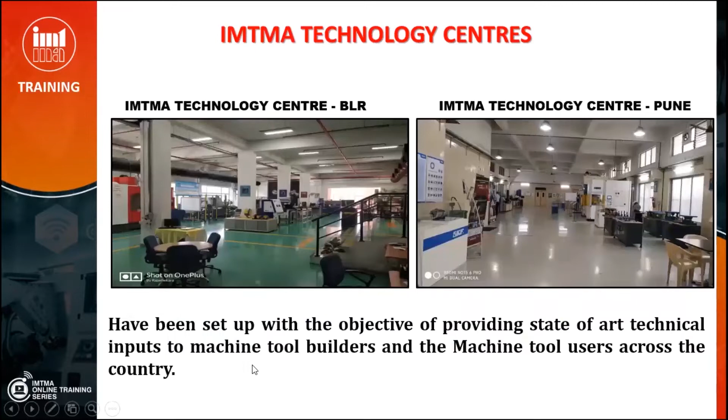Our technology center in Bangalore and the technology center in Pune, and each of these facilities are fully equipped with all the requisite machinery, metrology equipment, accessories, automation lab with robot, and is completely industry 4.0 ready.

We deliver our training programs in 4 different ways: short-term programs, in-house programs, e-learning, and long-term courses meant for young graduate engineers. Our classroom training programs are delivered by experts who have experience in excess of 30 years, with a blend of theory and hands-on training wherever possible.

We supplement the programs with demonstration of live machinery or industry visits wherever possible, and we encourage a healthy interaction between the participants and the faculty through the program.

Our e-learning initiative is delivered through an exclusive e-learning portal, and the current portfolio is about 10 programs which can be accessed by the participants at their own flexibility during the license period. The entire program can be taken at their own convenience and flexibility, with assessment, evaluation, and certification being provided through the e-learning platform itself.

Ever since April 2020, we have come up with the online training initiative, and till date, we have completed over 300 programs, addressed over 15,000 participants, and we have made these programs easily accessible to various types of participants, which can be taken up at a minimum training budget.

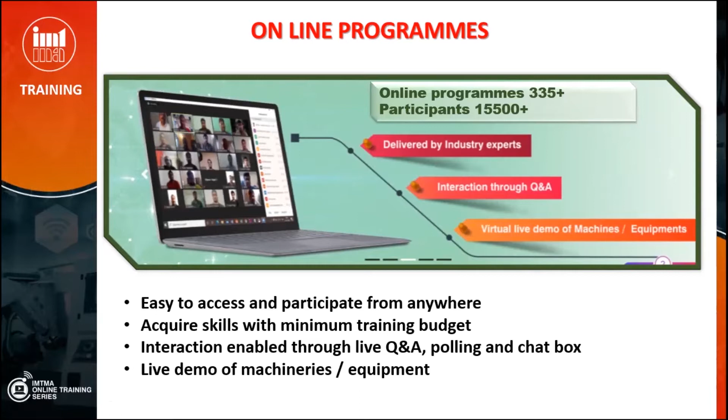And we enable live instructor-led programs with interactive question and answer sessions, polling, chat box, and we also provide live demos wherever possible during these training programs. Long-term programs are primarily meant for young graduates who wish to improve their employability prospects by taking up a few programs on design, production, automation, FEA, and these programs are available in long-term mode for young engineers.

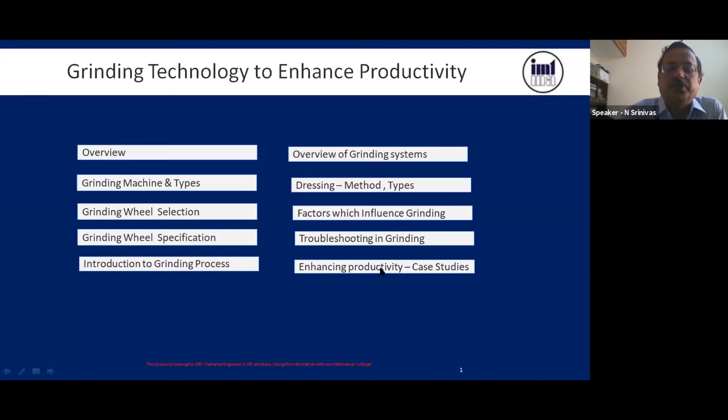Now let us start with grinding. In any manufacturing setup, grinding is a finishing process which involves multiple parameters like work material with correct heat treatment, process parameters, and selection of the right grinding wheel and machine.

This grinding is a finishing operation that comes at the end. Initially raw material comes, then soft edge operations like turning and milling happen, then it goes for heat treatment, and then it comes for grinding.

Grinding is the most critical operation in the entire process chain. The grinding wheel plays a major role, machine requirements are very stringent, and the skill of the operator also matters. Since it's a final and critical operation, any rejection at this stage involves high cost and affects the productivity of the company.

The grinding technology program is designed with the intention to impart a practical approach for grinding with appropriate industrial case studies, so that participants will understand the practical aspects of grinding. That is the main intention.

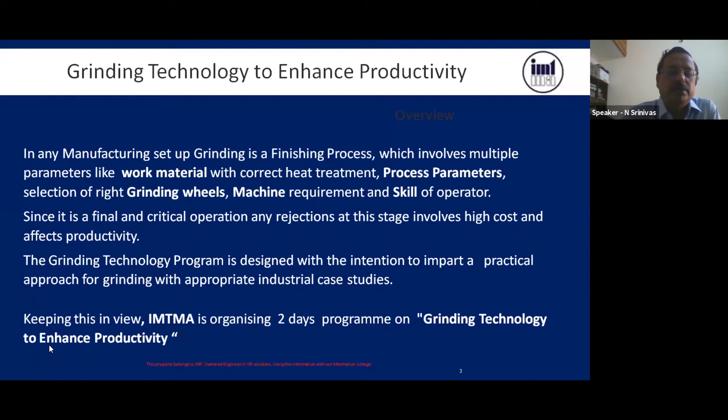As I told you, this IMTMA program is conducted for 2 days. Here I am giving some bird's eye view of it, starting with the system approach for the grinding process.

What are all the system inputs? One is, as I told, the machine tool - that is structural compliance, kinematics of the machine, and what type of bearings and spindles are used.

This is very, very critical in grinding. For example, if you are doing rough grinding, the types of bearings and spindles used are different. If it is fine grinding, it will be different. So depending upon the application, the machine is designed.

Similarly, operational factors like grinding cycle, speed, feed, and depth of cut will come. This basically comes in the program.

And work material - what type of configuration the component has. If there is some intermittent cut, you may use different types of feeds and speeds. If it is a continuous round and profile, it is a different one. So depending on the geometry of the material, you may have to alter the grinding parameters.

And surface properties - if it is a very hard surface, or if more stock is there, you will have different parameters. When it is fine grinding, it's less stock. So depending upon the work material, you may have to change the parameters.

Material properties mean hardness and toughness of the material. And tooling and supplies like abrasive - what type of abrasive you are using, coolant, and work holding. Work holding - you may be holding between centers, or you may be holding with the chuck. So these things will come with respect to process.

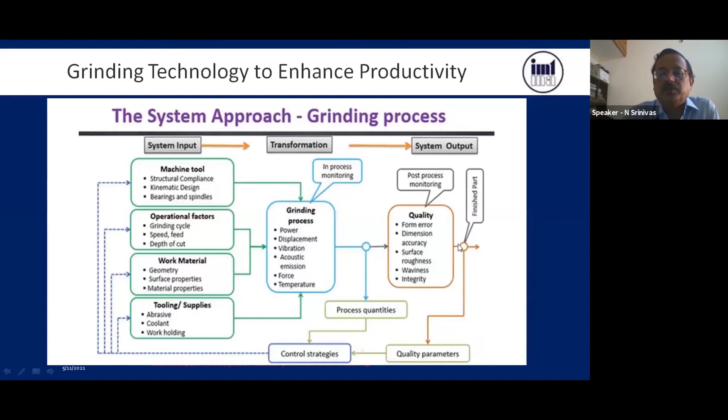Now we'll come to what is grinding. Grinding is the most common of abrasive machining. In case of milling, what happens? The cutting tool actually cuts the material, whereas in case of grinding, these abrasives - called grit - will remove the material.

It is a material cutting process which engages an abrasive tool whose cutting elements are grains of material known as grit. Actually, these grits are embedded in a bonding material, which I will come to in detail about the grinding wheel.

Along the periphery, there will be a number of these grits. So when the wheel is rotating and the work is rotating, it will come in contact with a number of grits so that it will remove the material.

The grits are characterized by sharp cutting points and high hot hardness, chemical stability, and wear resistance. Grits are held together by a suitable bonding material, which gives shape to the abrasive tool.

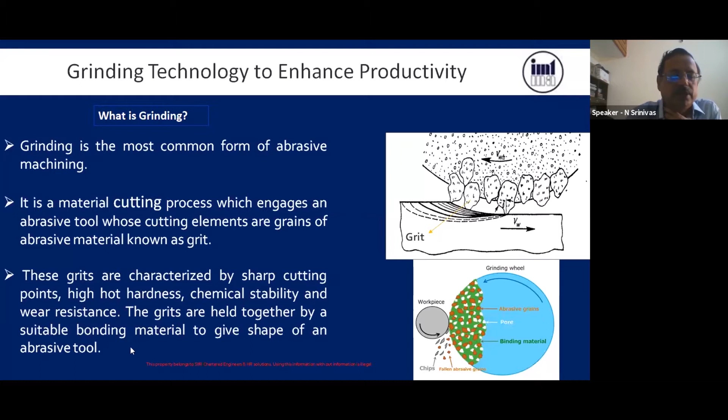So this is the grinding wheel. Now we'll come to how actually the interaction takes place.

Whenever this grinding wheel rotates and crosses the component, grinding takes place in three phases. One is cutting, where the material removal process removes the material, then plowing - where subsequent grains cause displacement - and finally sliding happens. In these three stages, the finishing of the component is achieved in grinding.

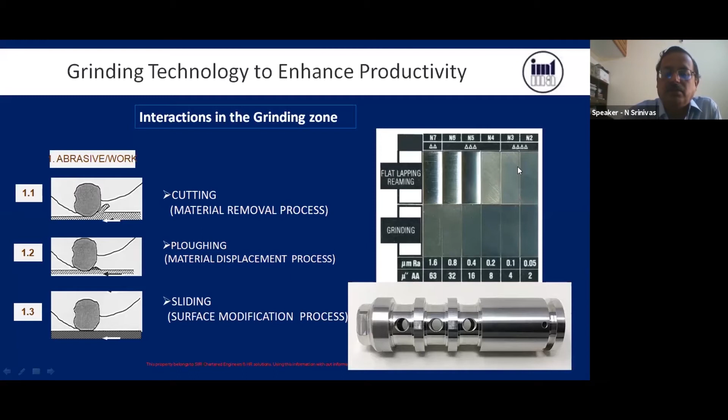When we talk about 1 micron, for example in turning we can achieve about 6 to 8 microns, and in milling, vertical and horizontal, about 10 microns accuracy. Whereas in grinding, we talk about less than 5 microns, and less than 1 micron in super finishing. So this is the accuracy that we are expecting.

What is 1 micron here? Micron can be visualized like this: if you take the diameter of human hair, it is about 70 microns. If you vertically slit that into 70 parts, that is 1 micron. The naked eye visual threshold is about 40 microns, so you can visually see only things of 40 microns or larger.

Our human white blood cell is about 25 microns, red blood cell is about 8 microns, and bacteria is around 2 microns. So this is the accuracy we are talking about in grinding. It is a precision process.

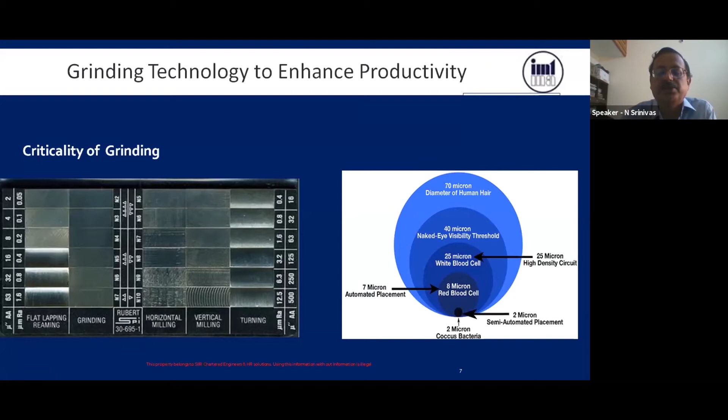What do we aim for in grinding? One is surface finish, and second is form characteristics like straightness, roundness, and cylindricity. That is what we expect in grinding. It is a finishing process, so most of the time we aim for stringent tolerances of form and surface finish.

Then why is grinding required? We understood what grinding is and why this grinding application, why grinding is required.

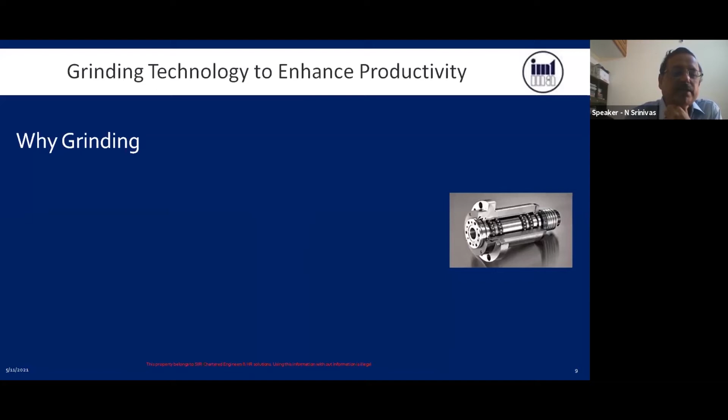Grinding is used for machining materials which are too hard for other manufacturing processes. Once after heat treatment, hardness will be in the order of about 50 to 60 HRC, which you cannot machine by turning or milling. So then you have to go for grinding. Machining of materials which are too hard for other manufacturing processes requires grinding.

Grinding is also used to finish mating parts with minimum friction. That is, whenever, for example, a shaft and journal come together as mating parts, both surfaces should be ground. Then only we will get the right fit and tolerance.

Wherever we want close dimensional accuracy, we have to go for grinding. And when we require a high degree of surface smoothness or surface finish, for example on certain faces and IDs, then we will go for grinding.

Grinding also achieves stringent form geometry like roundness, straightness, and cylindricity. When these are very critical, we can achieve them only in grinding, or in the next super finishing process like honing. For honing also, grinding should be a pre-process; we have to grind and then hone.

Grinding also provides finishing of parts with reliable size and form retention. We want consistent size requirement and also form retention. Form retention means if we achieve roundness and straightness, that retention should hold over a period when doing mass production. Then we use grinding.

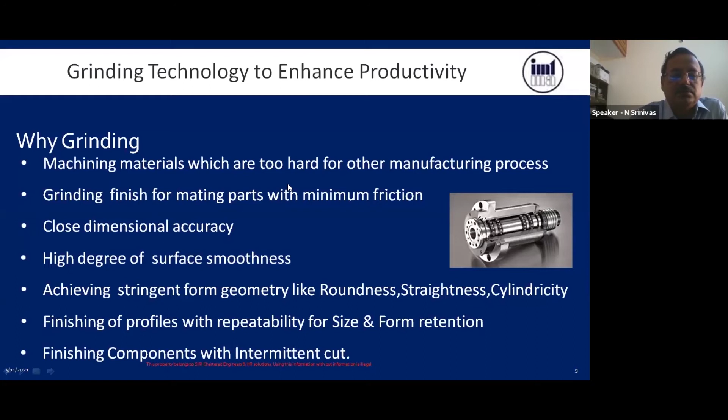So, links in the grinding process. One is material - what type of material we are grinding, whether it is hardened or soft, what is the hardness, and whether we are grinding diamond, aluminum, or steel. So the process depends upon what type of material we are grinding.

That is number one, and next is grinding fluid - what type of coolant we are using. For aluminum we use a different coolant, for steel we use a different one, and if you are grinding diamond, it will be different again. So grinding fluid is another link.

And the next link is the machine - what type of machine you are using. You cannot use the same machine for everything.

So in most of the machines, by manipulating our cutting parameters and certain tooling, we can use the same machine for different materials and different configurations of parts.

The next is grinding wheel, which I will explain in detail - what is its specification, that is also critical. Then comes clamping method, how you hold the component for different configurations. If the wall thickness is less, how you hold it, or if it is a rigid bar, how we hold it - there is a method of holding.

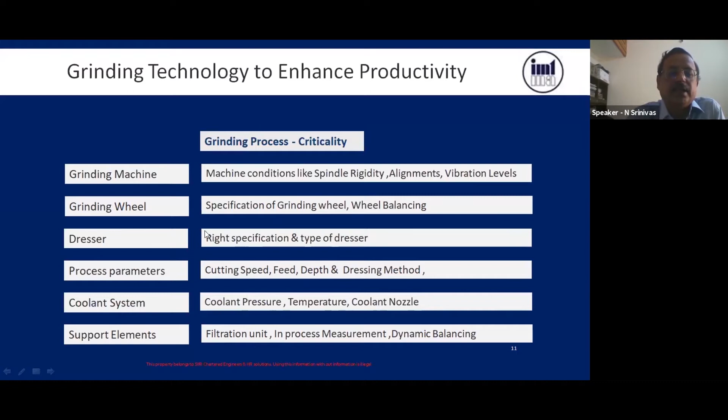As I explained, machine condition like spindle rigidity, alignment, vibrations, and grinding wheel specification are very, very critical, and wheel balancing is critical. When it comes to dresser, right specification and type of dresser matters. And process parameters - cutting speed, feed, depth, and dressing method. And coolant system - coolant pressure, temperature, coolant nozzle. And support elements like filtration unit, in-process gauging, and dynamic balancing. These are all the things which become critical for grinding. This is the link I have just elaborated here.

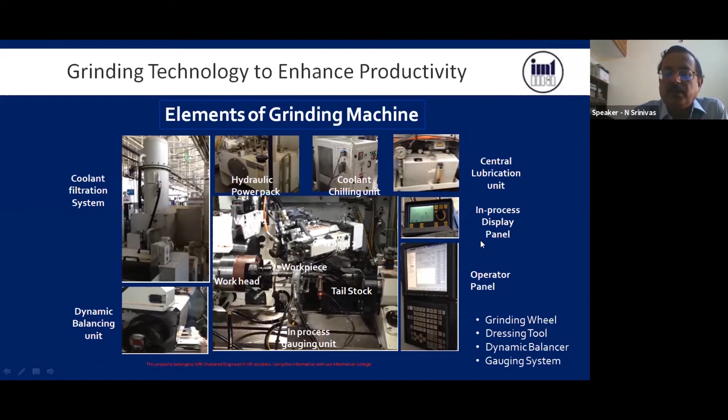Many times when you are grinding parts with accuracy less than 1 micron, the temperature of the coolant is very, very important. So cooling chilling unit and hydraulic power pack - this is basically for power, for clamping mechanism - and coolant filtration system, this is also very, very critical, and dynamic balancing unit. This is in-process gauge digital display, and this is my monitor. So this is the overview of our grinding machine.

Okay, now so far we understood what is grinding and why grinding, where we are with grinding. Now we'll see applications of grinding.

This grinding is very, very critical in auto ancillaries. Most auto components are ground, and it's used in steel industry, bearing industry, electronic components and devices, and aerospace. Aerospace has a lot of applications - turbine and medical industries.

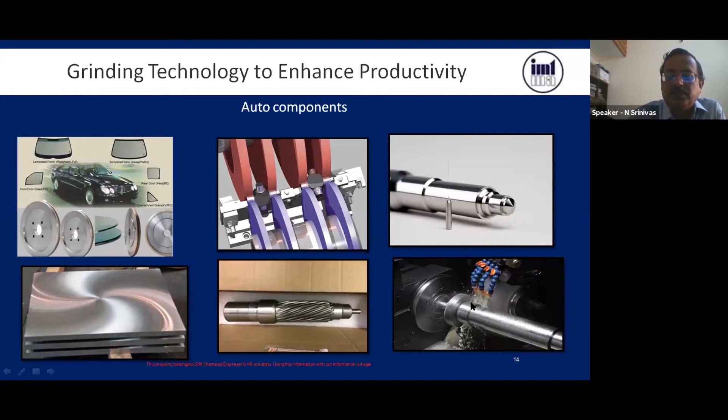So there are some examples of auto components like camshaft, surface finish grinding, cylindrical grinding. These are all the applications where we use drive shaft auto components.

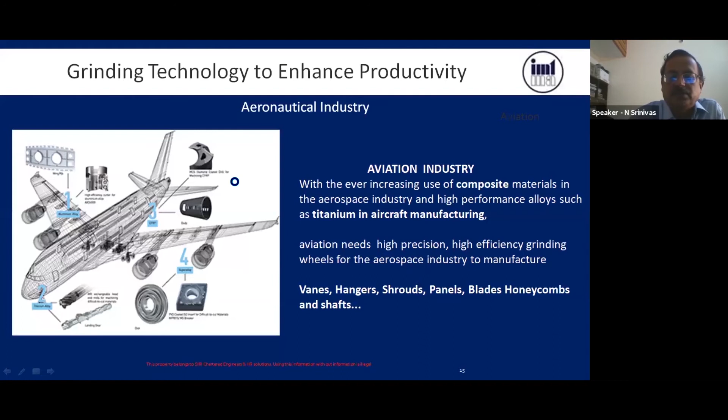Similarly, these aeronautical components need high precision, high efficiency grinding wheels. The aerospace industry is very, very critical, where we grind vanes, hangers, shrouds, panels, blades, honeycombs, shafts, etc. Such applications are there in the aeronautical industry.

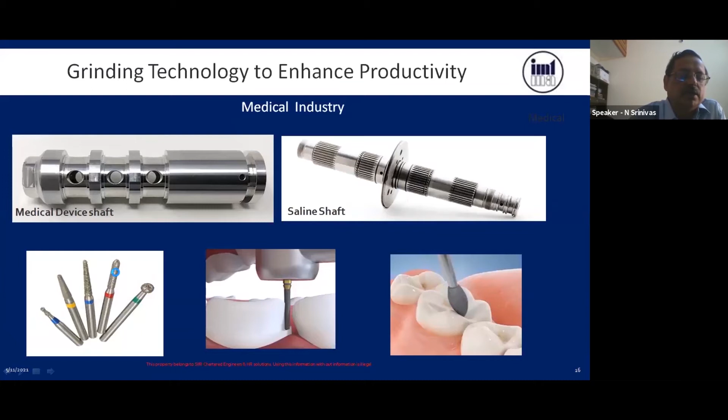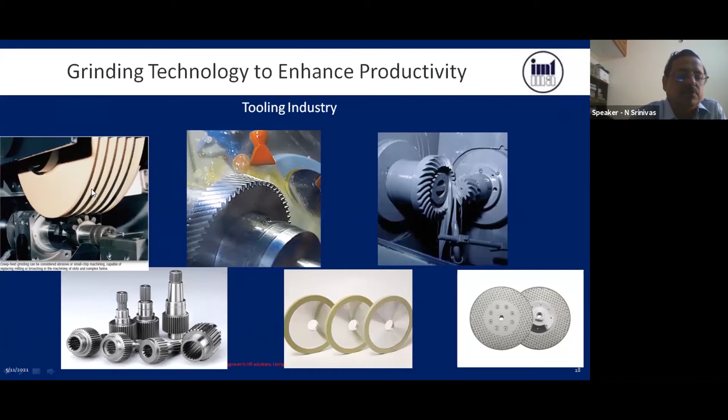In tool and cutter grinding, a lot of applications are there, like diamond wheels and silicon carbide wheels. In the tooling industry, lot of applications like gear grinding and gear thread cutting - such things are tools we use. And bearing industry - these are all some of the applications of grinding.

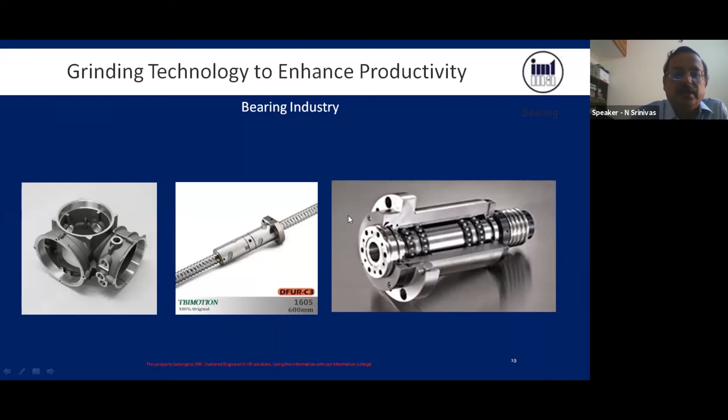So now, requirements of the grinding process in today's competitive environment - what are all the main requirements of grinding, both technically and economically? We have to see.

Whenever we need to achieve closer tolerances, as I already told, less than microns - like 5 microns or less than 1 micron - then we go for grinding. This is the challenge in grinding: close tolerances and complex geometry. Complex geometry means whenever the component has a number of steps and also wall thickness is less, at that time it becomes more critical. So the complexity of the component geometry is very critical.

Consistency in part quality, complex geometry, and processing of new materials are challenges. Because we now have to grind glass or carbide, new challenges are coming, so this is also a technical challenge in grinding - processing of new materials.

Variety and volume matter too. For example, ball bearing steel is hard, but we may have to process it in volumes. Then wheel life becomes very critical - you cannot change the wheel every day, so the life of the wheel is very critical. Whenever volume of material removal is more, the wheel should also last long. So what type of wheel you select, depending upon the material and volume of material removed, is also critical.

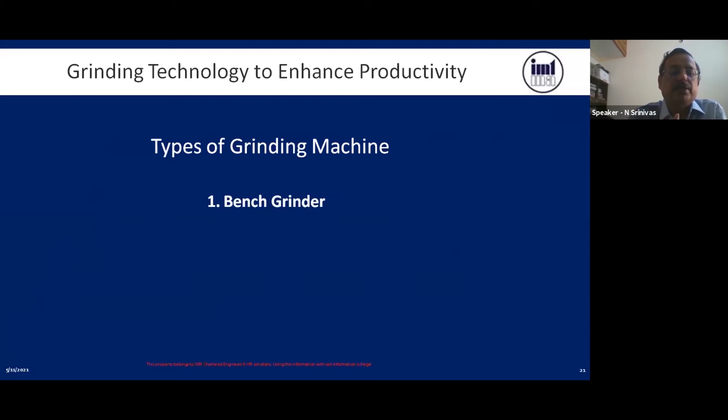And short lead times. There are different types of grinding machines - some basic bench grinders, which you must have seen in any industry. Then surface grinding machines, which are basically to create a flat surface - that is surface grinding. Then cylindrical grinders, usually used for cylindrical parts like camshaft grinding or shaft grinding with stepped features. And centerless grinders.

Other special grinding machines are there, like super finishing machines, lap grinding machines, and tool and cutter grinding machines. These all come under the category of special grinders.

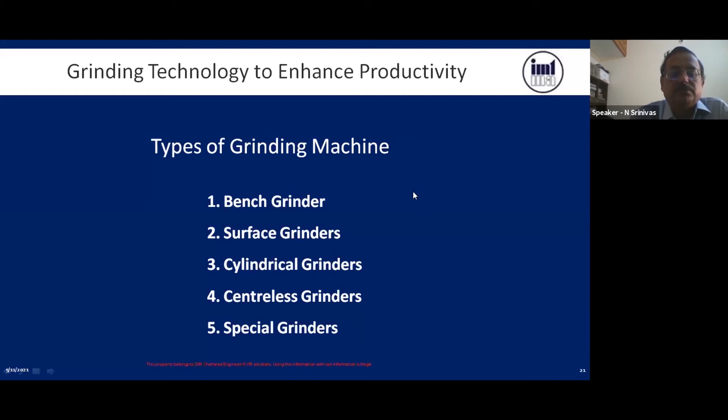Now we'll go in depth about the grinding wheel. This is the most important thing in any grinding machine - very, very critical. What is the function of the grinding wheel? One is removal of stock, generation of cylindrical and flat cut surfaces, production of high finish surface, cutting operations, and production of sharp edges and points. This is the main purpose.

So how is this grinding wheel constructed? The grinding wheel consists of abrasive. These abrasives are embedded in a bond. Each grit is embedded in this bond, which has high hardness - the grade is very important, and depending upon the material, we have to select the suitable grade. And structure - how these bonds are distributed, how abrasives are distributed in the bond, is called structure. I will explain this in subsequent slides.

This is the grain actually - this is the abrasive, and this is the bond. This is grain size, and the grade depends on the type of material we are grinding. And structure is the distance, that is porosity - how much space we leave between these grains.

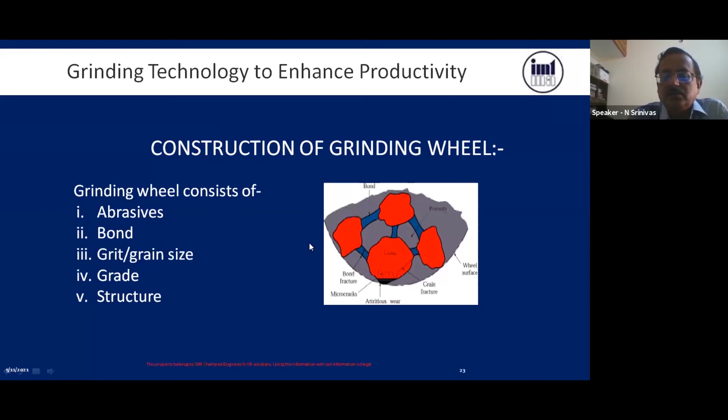Usually for any grinding wheel, the specification is given like this: one is what type of abrasive you are using. For example, 45C54H6S23 - if you are using aluminum oxide, it will come as A, if you are using silicon carbide, C, and if it is diamond, it will come as D. So this is the type of abrasive - this is the prefix.

Next is grain size - coarse, medium, fine, and very fine abrasive, depending on how much stock you are removing and what type of material you are grinding. This grain size has to be selected. Here it is 54, which falls into the medium size grain.

What is the grade? Grade is medium, soft, hard, and very hard. Here H is selected, meaning it is a soft wheel. Similarly, structure - as I told, how grains are distributed within the wheel - can be very close, dense, medium, or open. If you are removing more volume of material, go for open structure. If doing fine grinding, go for dense structure. Here we have selected 6, which is medium structure.

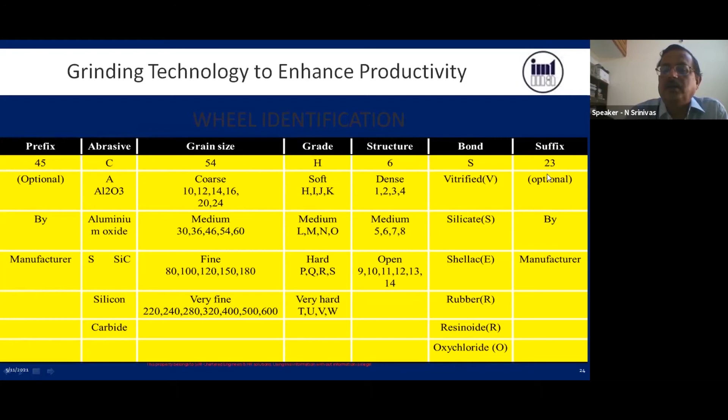Okay, this will give you the overview of this grinding wheel specification. This depends upon, one is material to be ground, what type of material. If you are grinding steel, you may use a different type of abrasive, or if you are grinding aluminum, a different type of abrasive. It depends upon the material to be ground, stock removal, how much stock you are removing, whether it is finishing grinding, and whether it is wet or dry. Sometimes we do dry grinding without any coolant. And speed and severity of operation and area of contact.

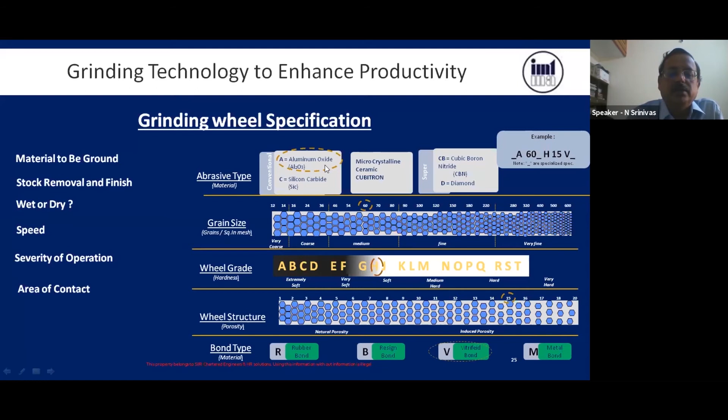And in the latest development of grinding wheels, other than that, we are now using new material like microcrystalline ceramic abrasives. In addition to aluminum oxide or silicon carbide, the latest is this ceramic abrasive, using submicron particles and special sintering process, microstructuring, self-sharpening property. As you are grinding, microfracturing will happen and it will open, so that you can optimize your dressing frequency. Instead of dressing once in 20 pieces, you can go for once in 100 pieces, because this will do self-dressing, self-opening type of thing. There we can use this ceramic abrasive.

This is the comparison of a normal abrasive and the ceramic abrasive. Here what happens, there is possibility of grain knocking out, total breakout will happen. And here microfracturing will happen. Whenever you are grinding and dressing, microfracture will happen in the grains, whereas here it is macro and here it is micro fracturing. So that is the difference between the wear pattern of your conventional wheel like aluminum oxide and silicon carbide, and this ceramic wheel, which is the latest in grinding wheel.

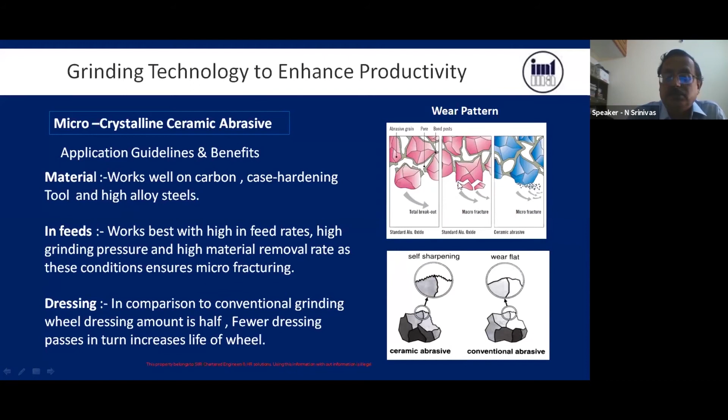And this is one example. I'll just give one overview of how one precision grinding machine looks. That's what I wanted to show you. I'll play one video.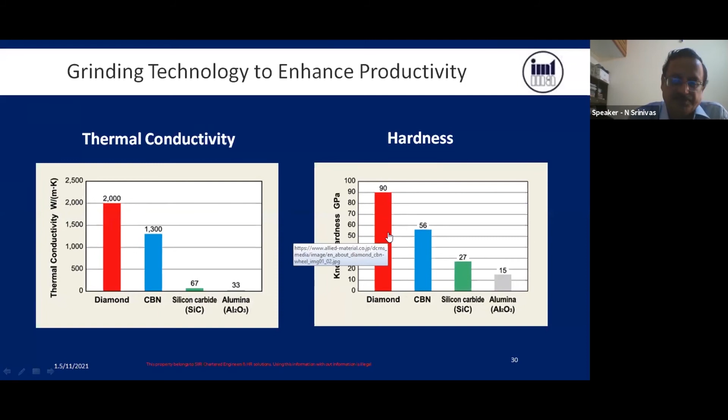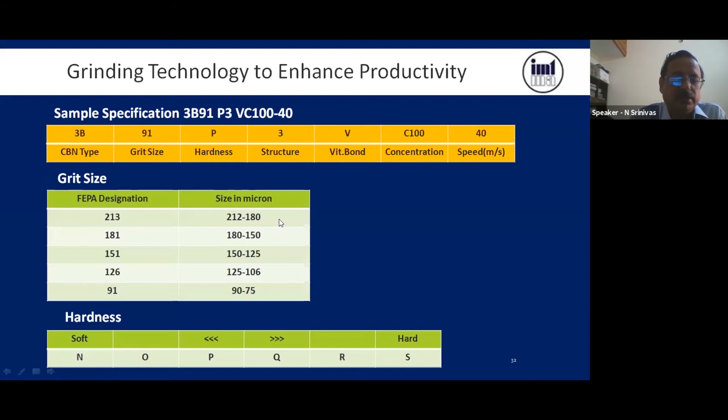Similar to conventional wheels, here also what type of CBN you are using - grit size, hardness, structure, bonding material, and concentration - is shown in the specification. For example, this bonded vitrified wheel: concentration is 100, speed requirement is 40 meters per second, structure is 3, hardness is P, grit size is 91, and CBN type is 3B. This is how we specify the super abrasives.

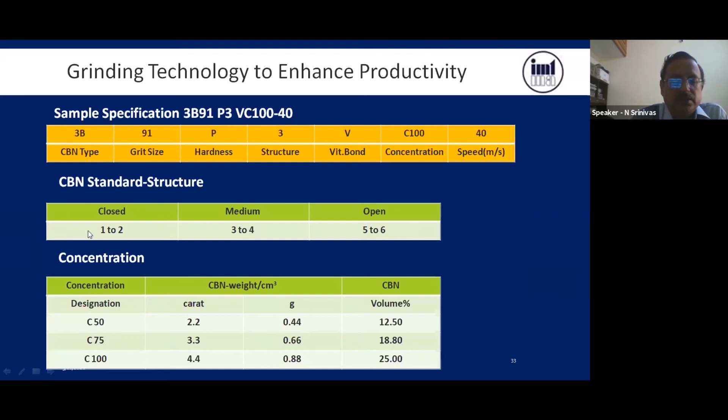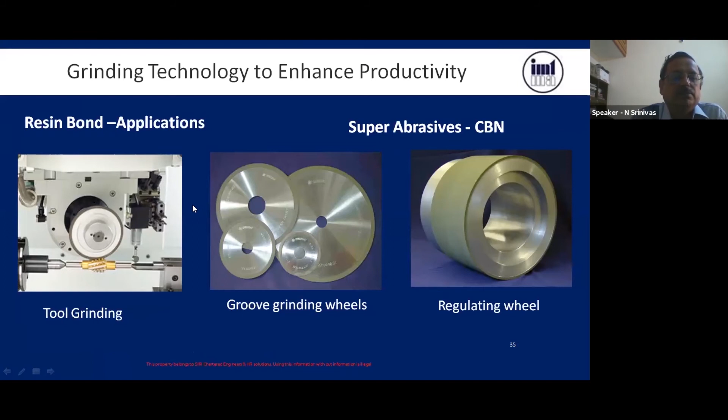For vitrified application, whenever hardened steel, high alloy steel greater than 60 HRC, or stainless steel is there, you have to go for vitrified bond CBN - also for hard chrome, nitriding steel, tungsten carbide, and ceramic grinding. Similarly, resin bond is used for cut-off wheels, groove grinding wheels, and regulating wheels of centerless grinding. Metal bonded is used for profile form grinding and honing sticks.

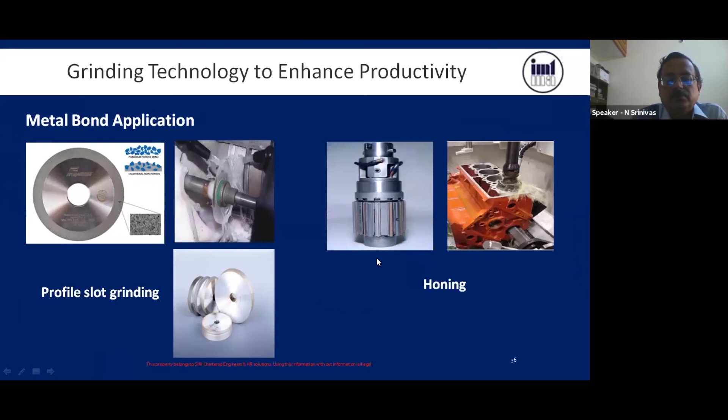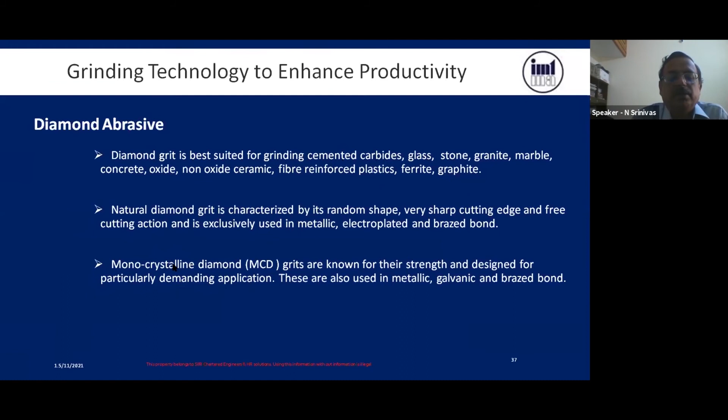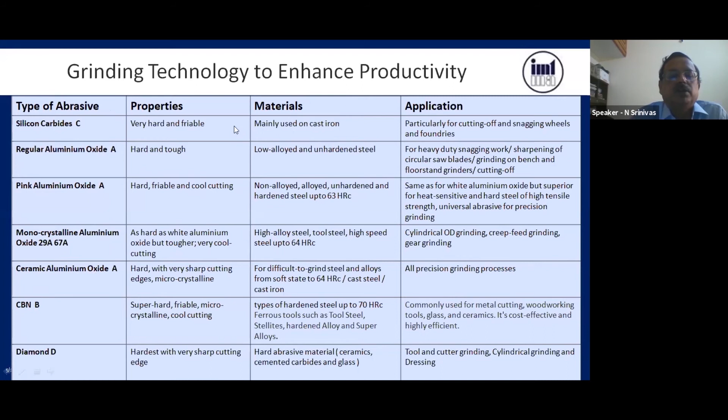This is a consolidation of different types of abrasives, their properties, materials, and applications. For example, silicon carbide is very hard and friable, mainly used for cast iron, particularly for cutting off and snagging. Aluminum oxide is hard and tough - there's pink aluminum oxide, monocrystalline aluminum, ceramic aluminum, and CBN. This table tells the properties, materials, and applications.

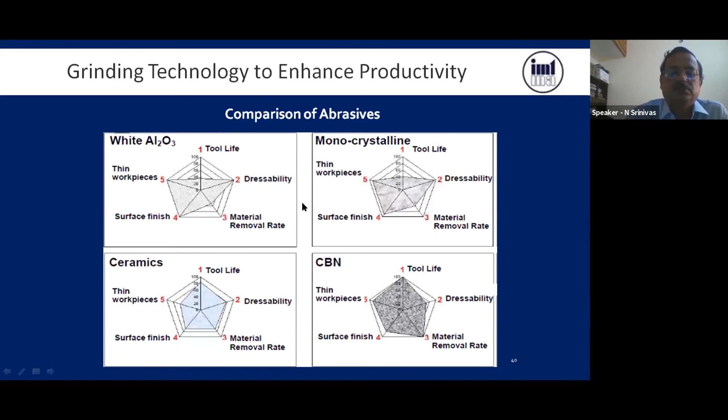This is just a consolidation of different types of abrasives and what type of applications they are desired for. And you know how this cutting speed is calculated: V equals pi d n by 1000, meters per second.

These are all basics. One example I have shown here: RPM is given by, usually we use 30 meters per second, here Vc is 30, and 1000 into 60 divided by that is around 19, giving 1900. So the RPM of this wheel should be around 2000 RPM. If you have got 2000 RPM, then you will get the speed of 30 meters per second.

And the workpiece RPM, how to calculate? This is Vw into 1000 by this, around 600 RPM. And the speed ratio of the workpiece to the wheel is 100.

So this is just the formula for calculating cutting speed and feed in grinding, that is the parameters. Also for different types of operations, like surface grinding, we usually use 20 to 35 meters per second. Thread grinding and camshaft grinding will go for 33 to 60.

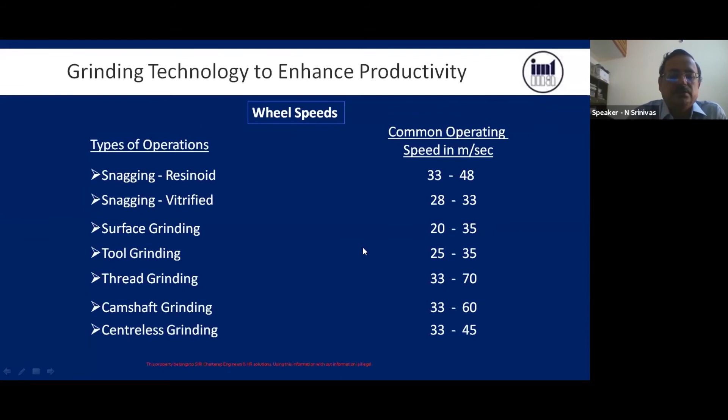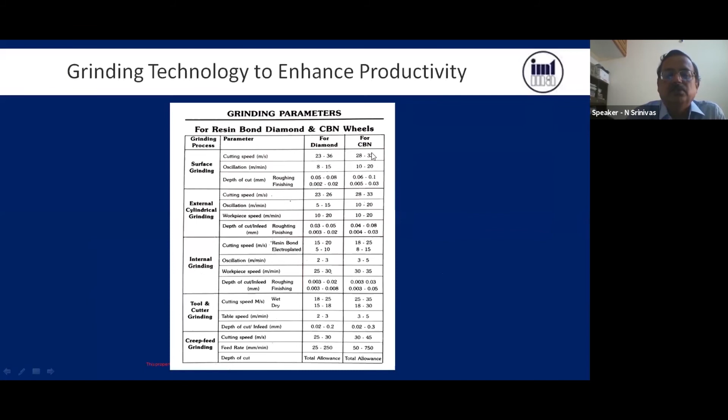So this is about different types of operations, like surface grinding, external grinding, internal grinding - what type of tool we use, and what cutting speeds we use. That's the same thing we have to have.

And then comes dressing. In any grinding, we get the finish depending on how you dress the grinding wheel. So here one is truing of the grinding wheel. Whenever you mount the wheel, first you will true it. Truing is a process done to make the job axis concentric to the machine axis.

Whichever high points are there, you will knock them off. By using a diamond dresser, you will dress the wheel so that you bring the job axis concentric to the machine axis. That is what you do in truing.

And then you will go into dressing. Dressing is a process in which the wheel bond is removed - it is opened out, the grits will be opened out. Wheel bond is removed to expose the abrasive grains. It is also done to provide space between the abrasive grains for chip flow and coolant flow.

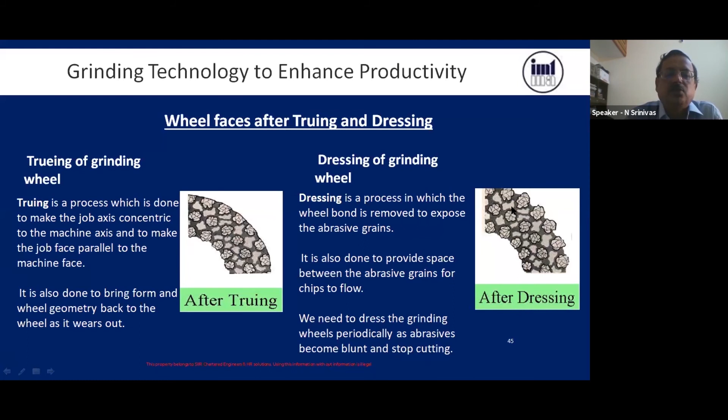We need to dress the grinding wheels periodically as the abrasive becomes blunt. That means whenever it clogs, every 10 or 20 pieces, you will go into dress that wheel to open out the abrasive periodically. So whenever the abrasive becomes blunt, you will open it out by dressing. This is the difference between truing and dressing of the grinding wheel.

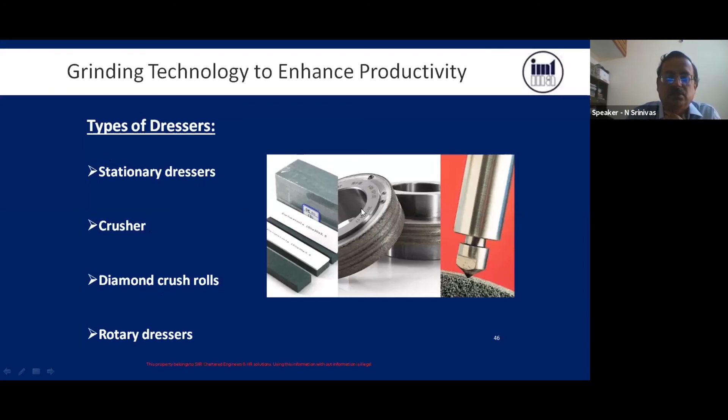In dressing also, there are different types of dressers. Stationary dressers are there, like single point diamond or multi-point diamonds, and also crusher diamonds - this is a single point tool. Crushers are like this, crushers and diamond crush rolls, and rotary dressers. These are the different types of dressers we use.

The coolant nozzle design is also very critical in grinding, because if it's just splashing in the grinding zone, there will not be sufficient heat carrying capacity. You have to impinge the coolant with high speed, so that the wheel carries it along the surface. Then only in the grinding zone will there be sufficient cooling, and it will carry the heat.

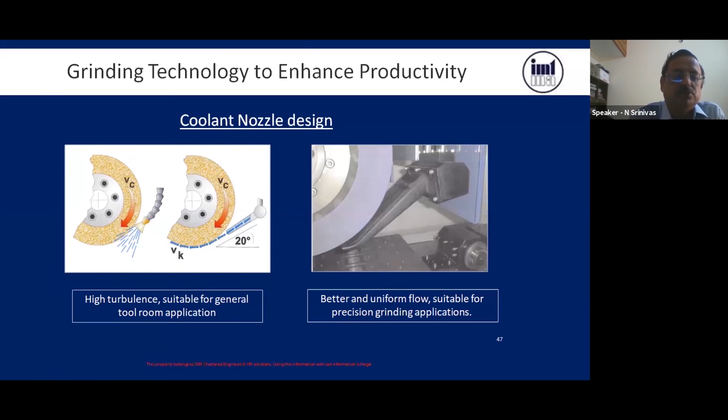Otherwise, this heat will be transferred to your component, causing repercussions like cracks, or a rehardened zone, or retempered zone. Such things will happen. The nozzle design is very critical, and the speed of the coolant is also very critical. It actually forms an air barrier, provided to ensure grinding flow. Usually at the nozzle top we give an air barrier, so that air will not go inside, only coolant will come.

And this is G ratio. I think this is not this one.

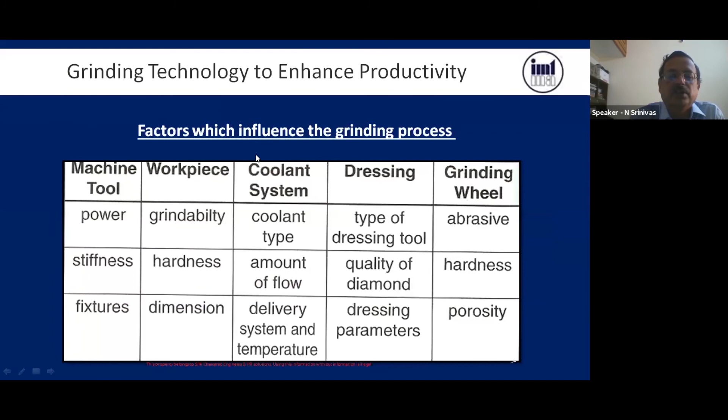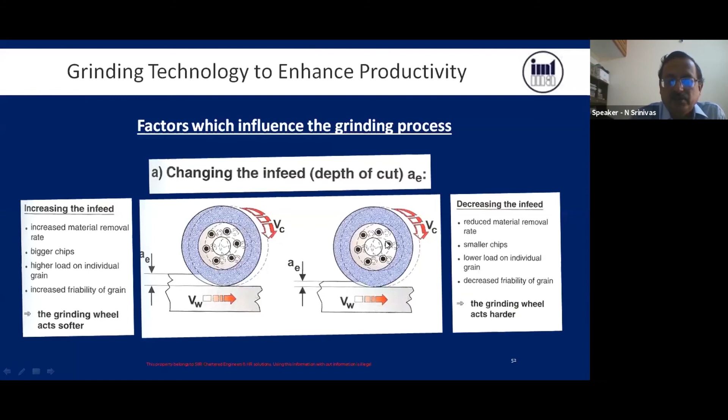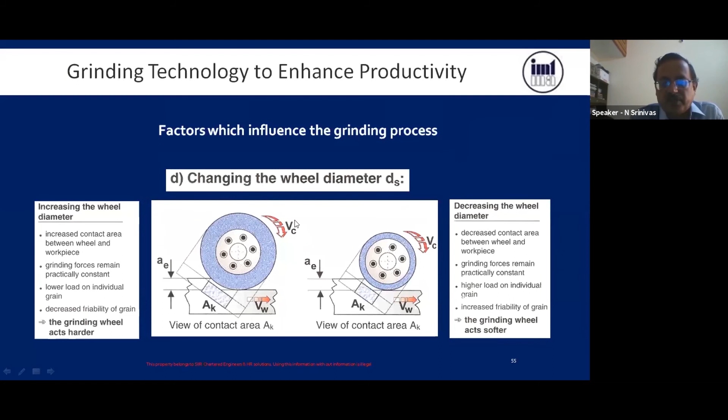Which are all the factors which affect grinding? Machine tool, workpiece, coolant, what type of coolant system you are using, dressing, and grinding wheel, what type of wheel you are using. Also there are factors which influence the grinding process: changing the infeed, what type of infeed or depth of cut you give - that is critical. Next is changing the workpiece speed, which is also very critical. Then changing the wheel surface speed - these are all grinding parameters. Changing wheel surface speed and wheel diameter - if small diameter or big diameter you are grinding, then automatically the surface speed will change. And dressing method - what type of dresser you are using, rotary dresser or single point or multi point. These are all the things which influence the grinding and the quality of output you are expecting.

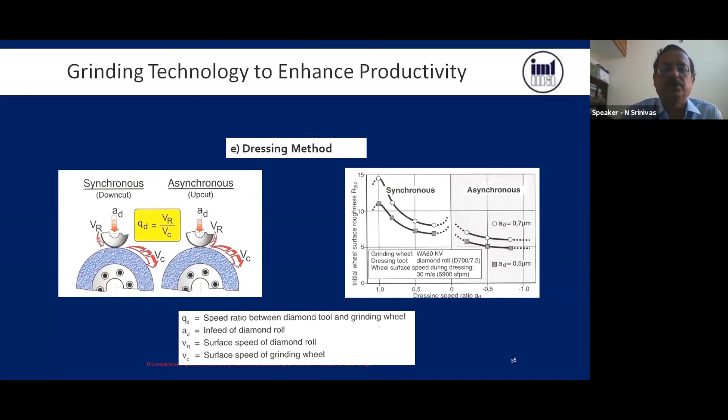Frequently we get grinding problems like grinding wheel hardness issues, burn marks, low surface finish, and form loss - meaning roundness and straightness. First few pieces will come fine, but subsequently you don't get consistency. So such troubleshooting comes up. For that, grinding wheel hardness and structure is important. Coolant nozzle, filtration, supply, foaming, dressing speed ratio, direction of rotation, feeds and speeds, table rate, depth of cut, wheel speed, fixture rigidity and motion - these are all the influencing factors for problems.

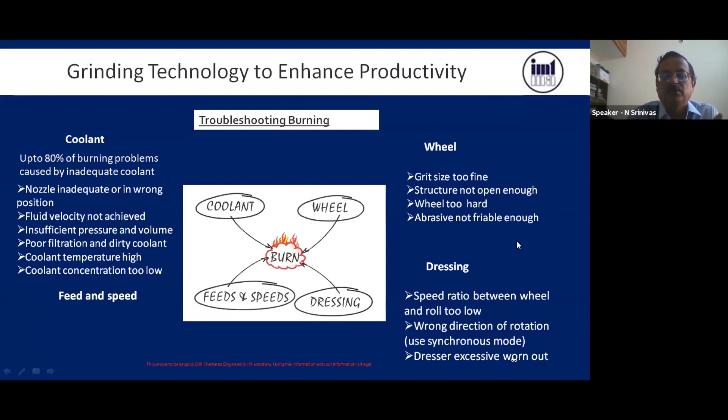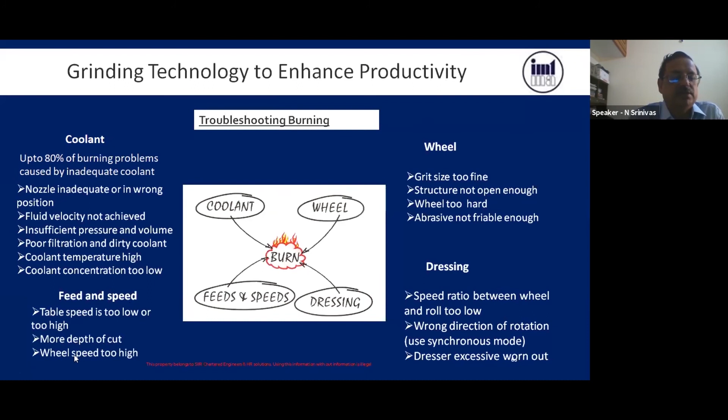For example, burning comes - what are all the causes for burning? With respect to coolant, up to 80% of burning problems are caused by inadequate coolant. Coolant is very important - at the right point, at the grinding zone, sufficient coolant should be available, along with velocity, coolant temperature and coolant concentration. Usually the ratio is 1:20 or 1:40 - this also matters. So this is connected with coolant and also the wheel. For example, if grit size is too fine, it will not take the cut at all - more heat is generated and you get a burning mark. Structure not open enough - open structure wheel should be there. And if the wheel is too hard, it acts very hard - hardness and abrasive not friable enough, that is the type of abrasive you are using. So this is connected to the wheel. Dressing speed ratio between wheel and roll, wrong direction of rotation, and dresser excessively worn out - if a dresser is worn out, instead of opening out the wheel, it will blunt it further. These are all some tips for troubleshooting burning, along with feed and speed, and more depth of cut - these are influencing factors for burning.

Similarly, if you take loss of form - roundness or straightness going wrong - what are the causes? Wheel soft, structure open, application, wheel out of balance. Balancing is very important - whenever we are grinding in mass production manufacturing, form is very critical, like roundness and straightness. Then we suggest dynamic balancing in addition to static balancing.

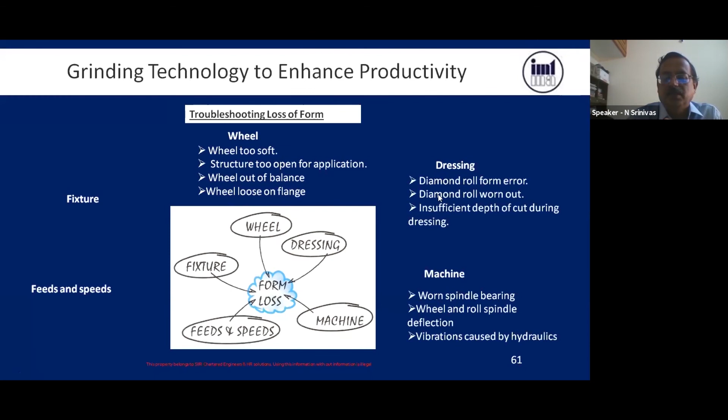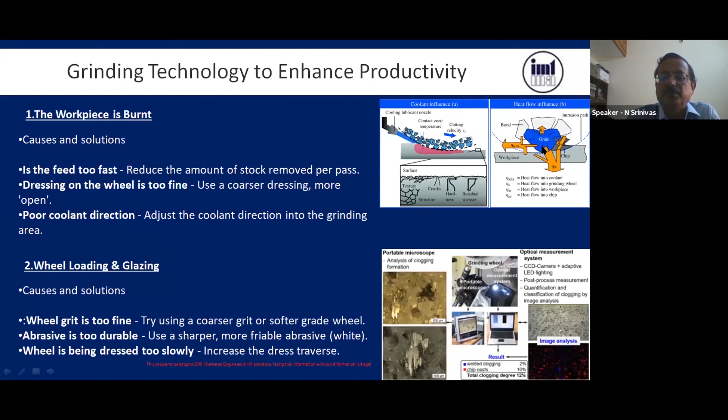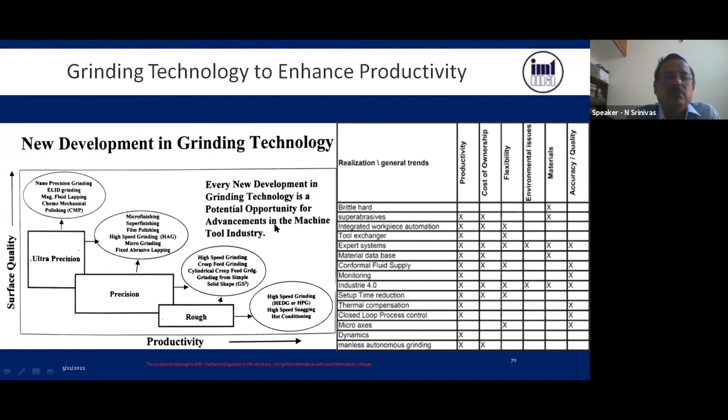Finally, any development in grinding - there are different types of grinding. For example, ultra precision grinding, nano precision grinding, when we talk about less than 1 micron, depending upon surface quality and productivity. You have to balance which one to use - productivity is important, but at the same time you have to achieve stringent quality. One is ultra precision, rough, and finish, like that. So here micro finishing, super finishing, film polishing, precision grinding, and rough grinding. Whenever high speed grinding or rough grinding removes a high volume of material, your productivity is more, but surface quality achieved is less. Whereas in ultra precision, your productivity is less, but surface quality achievement is more. So in grinding, you have to balance what is actually required. One important thing to see is, whenever we talk about accuracy and precision, the difference between accuracy and precision is very, very important.

And finally, why we do this in grinding and finishing operations in the auto industry: we do mass production, so here productivity is very, very important. Even though you have to achieve that precision and accuracy, at the same time you have to maintain productivity also. So how to improve productivity in grinding is a big subject, but I'm just giving a glimpse of it.

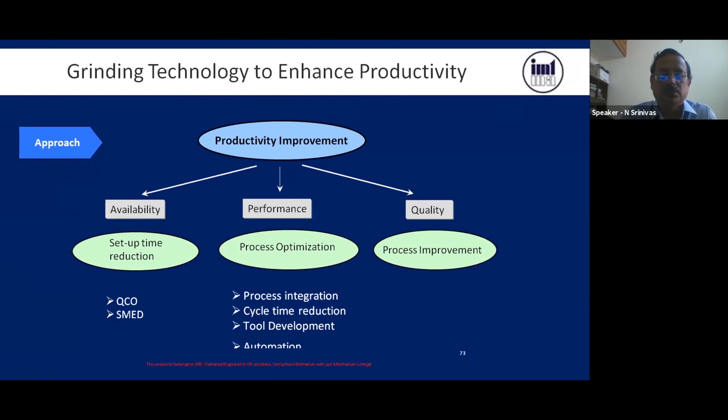So finally, if you see here 10%, here 10%, here 10%, you'll lose about nearly 30 to 40% of the productive time. Productivity will be lost. So here, process improvements QCO and SMED - single minute exchange of die - these things play a role in reducing setup time.

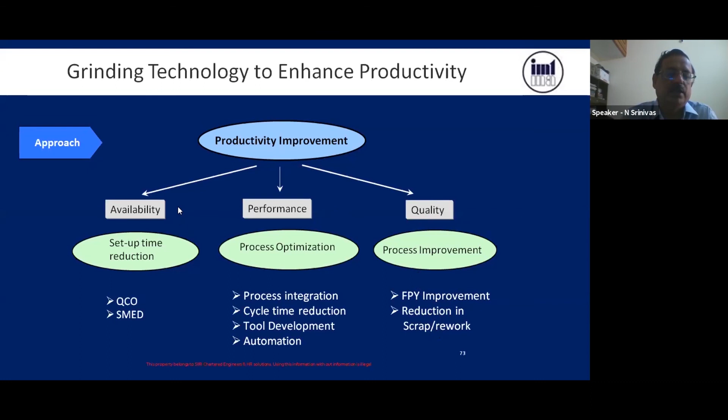In optimization, process integration and cycle time reduction by improving tooling can reduce cycle time, and automation can help increase output. That is the basic performance aspect. Also, first pass yield improvement and reduction in scrap and rework can reduce quality losses. Quality loss, performance loss, and availability loss - addressing all these, you will get improved productivity.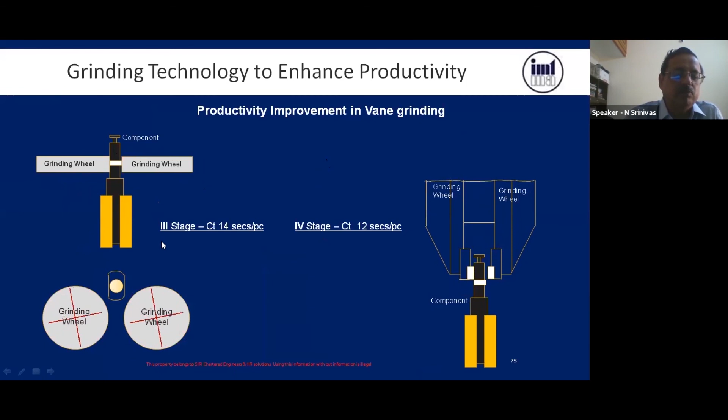Further, instead of doing surface grinding with one wheel, we brought in two wheels so that the component moves between these two wheels. Like this, we improved the cycle time from 24 seconds to 16, 16 to 14, and then 12. I think with this, I'm concluding.

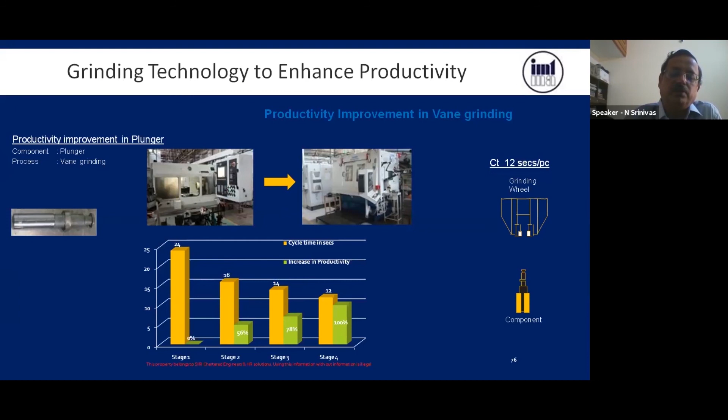We understood the criticality of grinding, why grinding is important, what are the applications of grinding, how to select the specification of the grinding wheel for different applications, and how to optimize and improve the productivity. In short, these are the things we have covered.